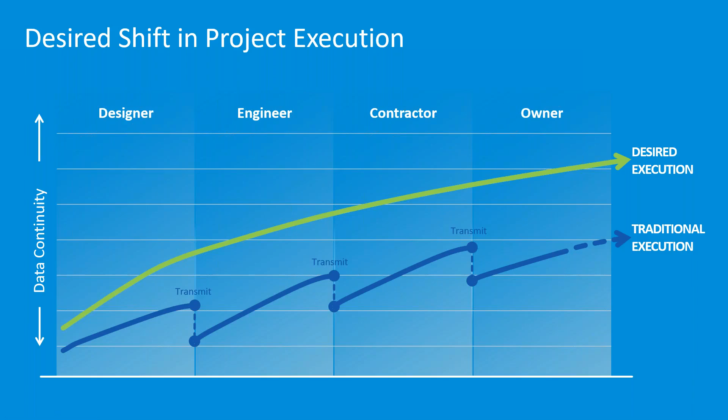That green line for us is really at the core. It means we've got a single source of truth, which is nothing more than a data management solution in the cloud. Our project data sits there.

And then depending on what discipline you're working for, we have some verticals on top of that. So essentially we're talking about a common data platform, which is BIM 360 Docs. Depending on the discipline—be that architect or structural engineer in the design phase, or in pre-construction—we want to understand whether what we're developing is indeed viable, from a clash detection point of view, from an aggregation point of view: is everything okay?

But then in the end we're really going to go to the construction side. We want to do health and safety inspections, progress tracking, etc. So all of this is the remit of BIM 360, and some tools that sit alongside that, such as the Assemble solution and PlanGrid. I'll touch upon those very briefly today.

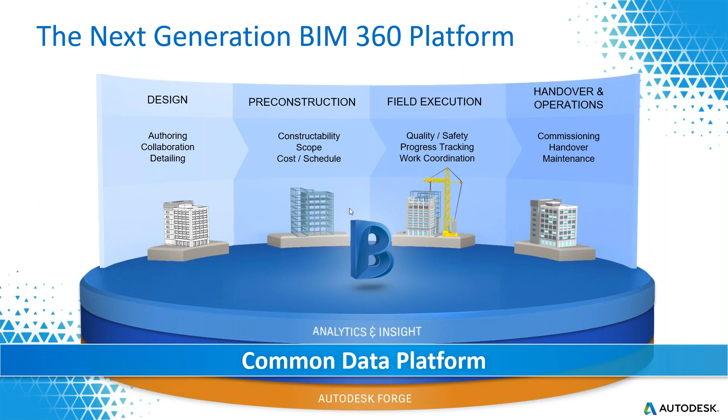Then in the end, as I mentioned, we're going to go to handover and operations, and this is really where we're going to be talking about digital twin. So before we can get to that—and we've done 3 webinars already on design—we need to bridge this gap, which we're going to be talking about in the next hour.

So from that phasing point of view, we've got design at the beginning, that's essentially BIM 360 Design. Then when it comes to constructability, clash detection, model coordination, that's BIM 360 Coordinate. I'm not going to touch upon this too much because that's going to be webinar number 5, where I'll be talking about coordination, and then BIM 360 Build.

So I'll touch upon BIM 360 Build today a little bit, but we're also going to revisit BIM 360 Docs in some of the aspects there. All right, so now that we've got this, let's actually dive into the solution.

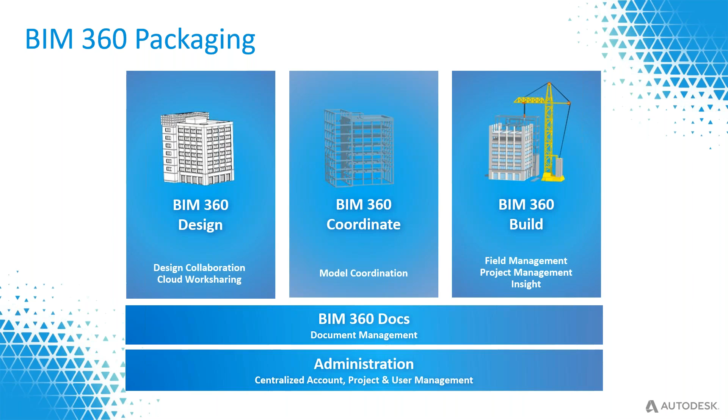I'm going to start with BIM 360 Docs. I've got a couple of things open here for today, but essentially this is what we're looking at, BIM 360 Docs. So essentially this is sort of Windows Explorer in the cloud on steroids, I would say. There's a lot more to it than just Windows Explorer. Yes, we can create folders, yes we can have security on it, but there's a lot more to it. It would take us too far to talk about everything.

The point I want to make here is that we're looking at a certain hub. This is the environment, in our case it's EMEA TS—Autodesk EMEA TS—this would be the company name that purchases the solution, for instance. And then we can have a multitude of projects underneath that. So we're looking at a very specific project, called BIM 360 FY21, but we could have multiple projects that we're working on.

So inside one of those projects we'll be looking at a setup of folders, right? So I can go in—this is highly customizable, we can set security on those folders. This can be done by user, by role of the user, or by company for which the users are working. So if I go in here, one of the most critical aspects of BIM 360 in general is the fact that we have this, what we call large model viewer.

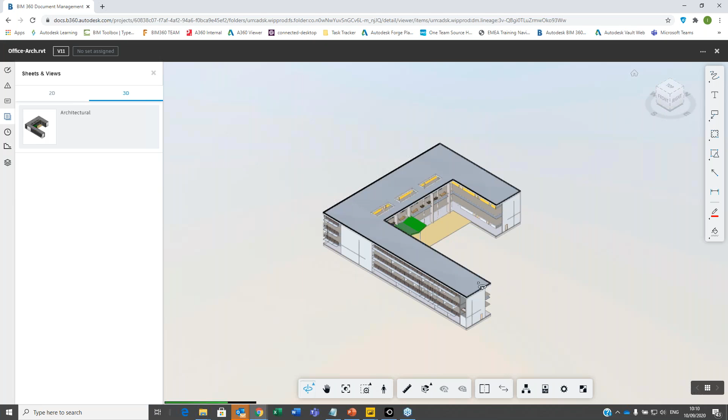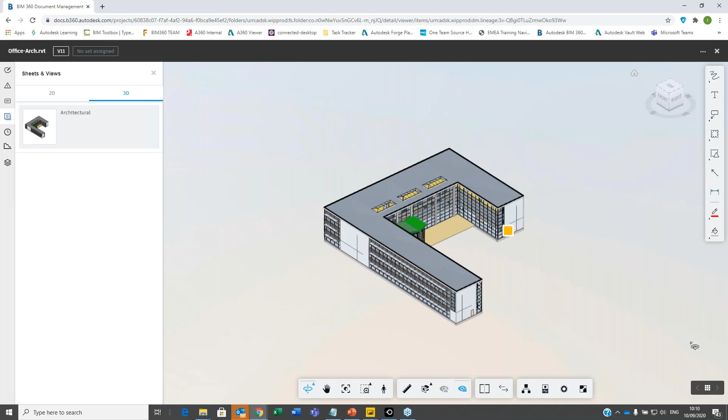So if I look at this file, for instance office architecture.rvt, if I click on it, it's actually going to allow me to visualize that file without the need for Revit. So this is a cloud-based viewer, and it allows us to view up to 60 different types of file format. This could be Revit, this could be AutoCAD, this could be IFC, SketchUp, Bentley MicroStation, SolidWorks, but also things such as Microsoft Word, Excel, PowerPoint, PDF, etc.

So loads of file formats are supported by this viewer. What does that mean? It essentially means I can start communicating with stakeholders within the AEC project, the building project, or the infrastructure project. Rather than having to flatten and dumb down everything to PDF and send it out by email, I can make sure they're part of BIM 360. Without the need for Revit or AutoCAD, they can actually view this file. And it's a lot more than just viewing.

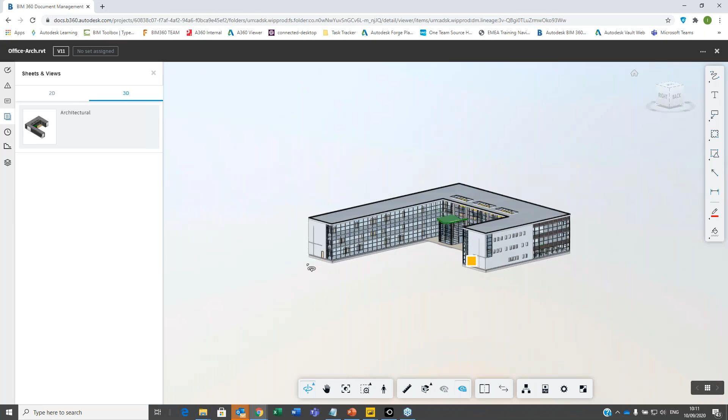So if I go in here, I can start measuring. Let's say I want to measure in meters, and I can say, right, I want to start measuring from this point to that point, for instance. Let's close this down for a second. If I'm mistaken here, I can just pull at that and adjust it.

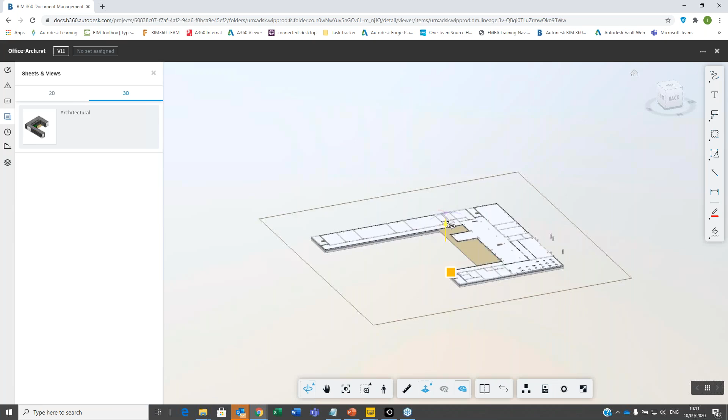Other aspects are that I can, for instance, start sectioning this model. So if I really want to understand what is happening inside of this building, I can do so. I can look into it. And since I'm looking at these different objects, I can also select them.

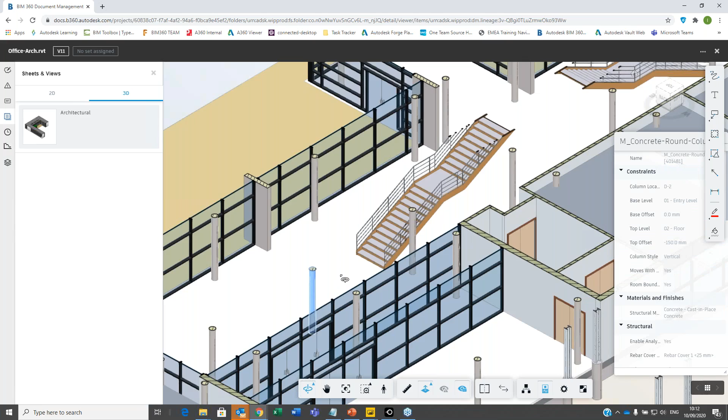Rather than just viewing these elements, I can really understand what the metadata is, and this is quite critical - it will come back later in the story. If I look at this column, it has all the metadata that comes from Revit, but it would also show metadata from AutoCAD, like the layer or block name, or the IFC characteristics if it were an IFC file. So what we're looking at here is some form of visualization of essentially a database, and that's going to be critical later because we can hook up all this information to other data sources. That's really where this aspect of digital twin comes in.

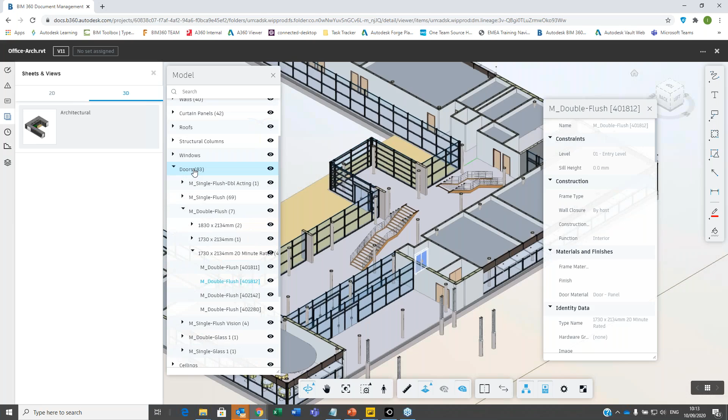Just to highlight a couple more things here - if I look at, say, this door, we get this information again. We also get the model browser, which depends on the file format, in this case a Revit file. So it's telling me this is a door, part of a list of doors. If I go in here, I can say show me all the doors - and I want to get rid of the sectioning. So we're getting a view of all the doors and where they're located.

If I want to understand the windows, I can do so as well. I can reactivate everything - as you can see, the interface is quite simple. So we can use this as a means of communication to just about anyone related to the project, and they'll get a clear understanding. This is like not flying blind anymore - it gives us a total understanding of this project, in this case, this one file. There are many more inside of this project, and we'll look later at how we can combine them into one bigger aggregated model.

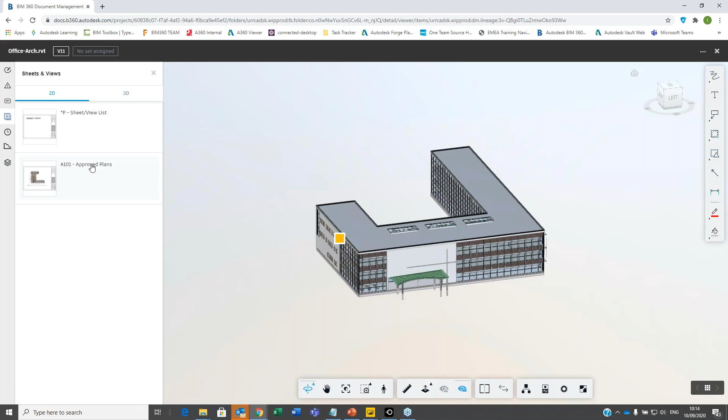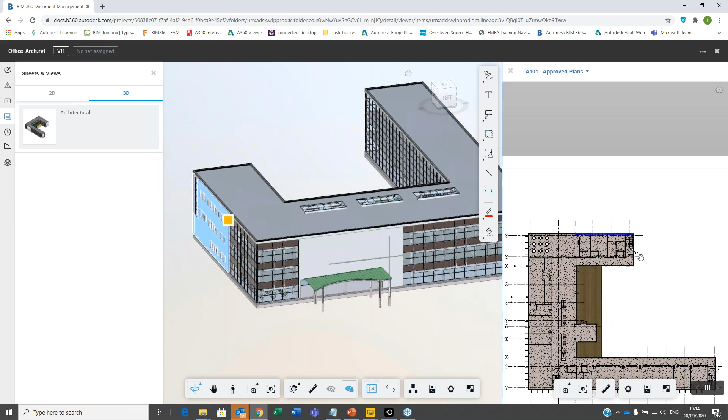The other thing is also that not just 3D, but we can also look at 2D. All of the information inside the Revit model as a 2D sheet is also there. So what I can do now is go in here and say I want a split view mode. If I look at, say, this wall, it's going to tell me where it's located in 2D as well, and vice versa. So if I select this door, it's actually going to show me this door.

I can zoom out and show all objects, so there's that one door that is also selected here. I can look at the properties here, no problem. So essentially, again, a single source of truth, not just at the project level or design level, but even at the object level.

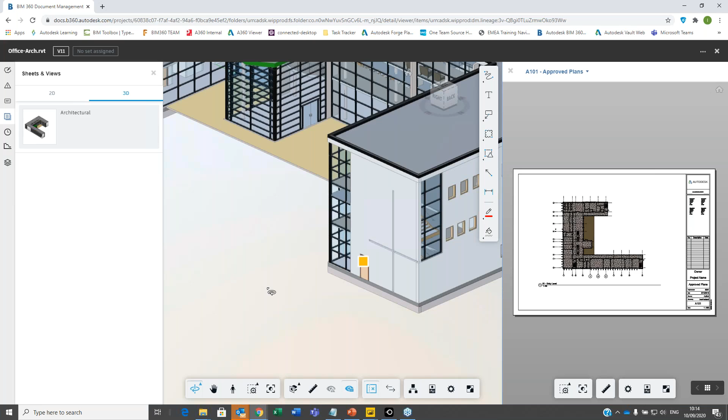All right, so I'm going to stop here with the large model viewer. As I mentioned, there's a lot more to it - we can manage issues, do markups, have RFIs, etc. Actually, you'll see an RFI here, which will come back later in the story. But let's come back and talk about some of the other aspects inside BIM 360. What you see here is a filter, which we call document management, but there are many filters here.

So we can actually look at cost, for instance. We can look at how people are going to collaborate from a design point of view. That's really the remit of BIM 360 Design.

Here's my model coordination that I'll talk about in two weeks' time. We've got a couple of things such as checklists, health and safety inspections that sit under field management. We can do submittals, we can do RFIs - that's the remit of project management here. Again, too much to mention today.

What I want to show you is one last thing, which is this asset module that we've created some time ago. Essentially this allows us to manage not just view on a sub-component or sub-file level, but really manage those elements inside of BIM 360.

So for instance, if I go in here and say duct fittings, maybe standard, I can click on this rectangular duct. What you'll see is I get a listing of specifically those rectangular ducts, showing the status: installed, specified, etc.

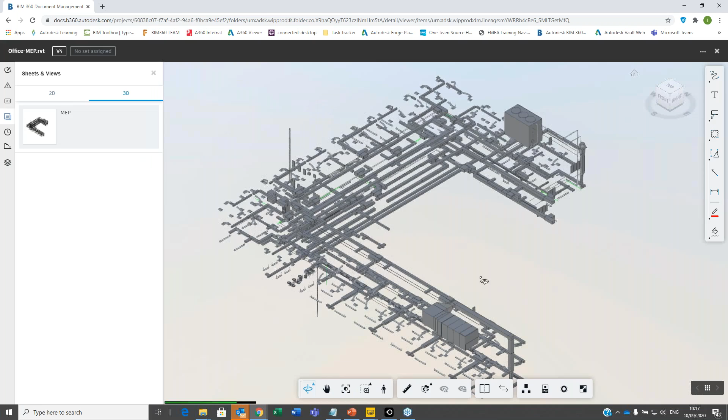This is clearly an MEP story, so let's go back to document management. I'm going into my design here again, into my MEP this time. So we're going to be looking at a different design of the project - this is all of my systems inside of one file.

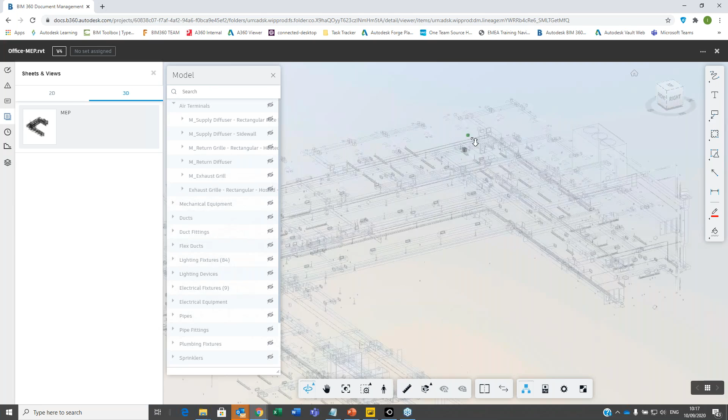You'll notice it says air terminals, mechanical equipment, lighting, pipes, etc. - it's got all the disciplines inside. So what I can do now is go in here and say, okay, I want to look at this one and see this rectangular duct cross. So that's where this guy is sitting.

If I look at this and go into the properties again, you'll see it says rectangular duct cross, etc. And interestingly, it also tells me data - this is the BIM 360 asset link. So I can go back and forth. I can click on this one and it will actually open BIM 360 Assets. It will jump through that whole list and open that very specific item again with the very same Revit ID. Okay, so that's what we can do here.

As I mentioned, the whole thing around this asset module is that it's connected to the design. There are a couple of ways of exporting that information as a list inside of BIM 360. But the main thing is we can specify the status of this thing, create issues and checklists, and put attachments on there. So if we have, say, a technical specification for this specific asset - and remember, this asset can come from maybe even an IFC file or a Revit file - we have this information here and can attach all of that rich data.

So it's not just for a web interface that we have. Let me just quickly get my iPad up here. Okay, so let's go into my viewer here and switch on my screen mirroring. There we go - so I'm looking at BIM 360 Docs, the app on my iPad, right?

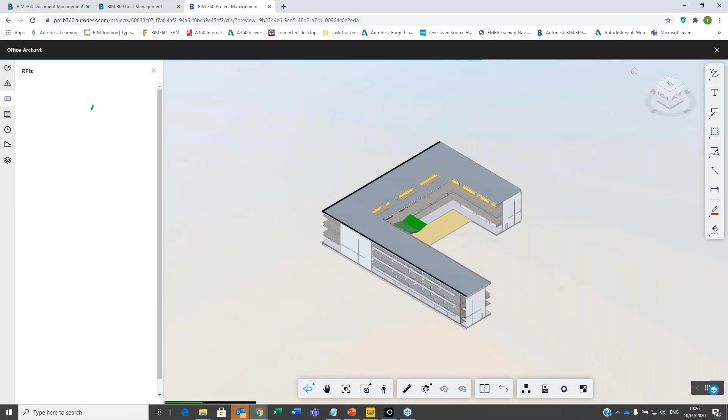So an RFI, potentially, if the workflow went through and the manager said, yep, this is indeed a problem and it's going to cost money, we can actually hook up the two of them. If I go in here, it brings me to my RFI module in project management, and it tells me the status. There's actually a document attached to it - remember this Office-Arch.rvt file. So we can create those RFIs on a mobile device, have them reviewed by the manager. This is a problem, we're making it into a cost element and we analyze the cost. That's really the concept of enriching the data as we go along.

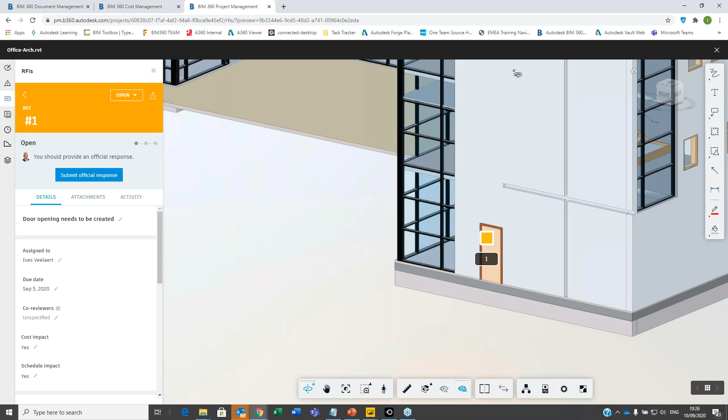This is effectively that one RFI we looked at in the past. It's still open, but as a manager, I could say, right, I want to move this forward. So I can submit an official response. Right, so that's my cost module, and there are many more. The most important thing is all of them are connected to that very same rich information, and we're just building on top of that through submittals, transmittals, checklists, on-site work, etc. This gives us a total picture of our AEC project, our building project.

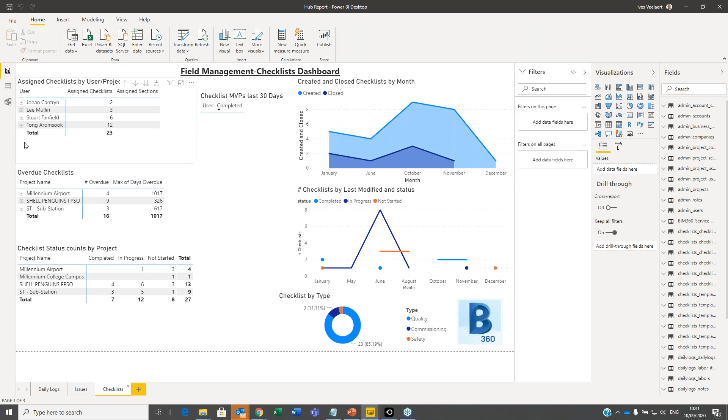So with those checklists and everything, that is the very same view. Again, I can publish, get the URL and bring it back into BIM 360 docs, which you see here. This one. So to make sure that all of this data is up to date and now we fully understand - we're getting into the understanding of the building as it's going to perform as we're building it. This is already, to me, part of the digital twin analysis, if you will.

All right, so with that, let's quickly move forward. We've got all of this design information. It's moving through the timeline of the project and it's getting to the construction side. We've shown a couple of things with mobile devices, etc. So let's say we're now ready to take the next step up, which is connected to other data sources and move towards that concept of a digital twin.

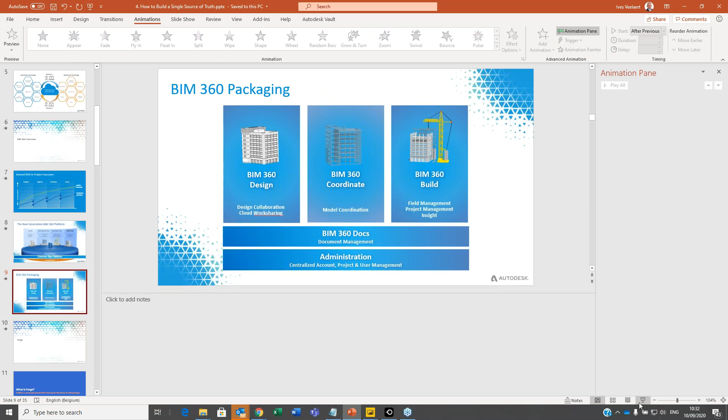So let me just go back to my PowerPoint here for a second, and I'm going to move very swiftly into the Forge story. We're going to use the API to connect to just about any database that is out there and that we need - maybe because there's other information in there, maybe that's an ordering system and we need to understand how this is coming through into our models. So essentially we're going to be using Forge for that.

And Forge is the API of BIM 360, which essentially means that anything you do inside of BIM 360, you can automate it. It's a bit like the API for AutoCAD or for Revit. Anything that you think of that you want to do with Revit in an automated way, for instance, generate sheets automatically - I'll get to that in a second because that's quite important also from a Forge point of view - we can do that with Forge on BIM 360.

So all of the stuff that we do inside of BIM 360, we can get to it through the Web Services API, and that's really what Forge is all about. It's a set of building blocks which can be brought together to do some really intelligent stuff, and I'll show you some examples of what we can do with it. Essentially it's like building a spaceship within Lego - it's exactly the same thing. We have these building components and we can do some intelligent stuff to, in our case, a building or an infrastructure project or whatever.

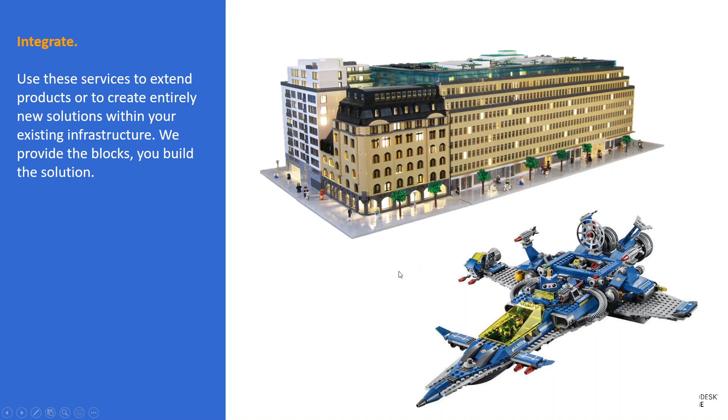Okay, so without spending too much time on the actual coding behind - obviously we're not going to do coding here - just a couple of concepts. Forge isn't one API, it's multiple APIs, and you see some of them at the bottom here. We've got the derivative service, which essentially allows us to view files in the viewer. We've got access control, the OAuth service, which allows us to log into the system.

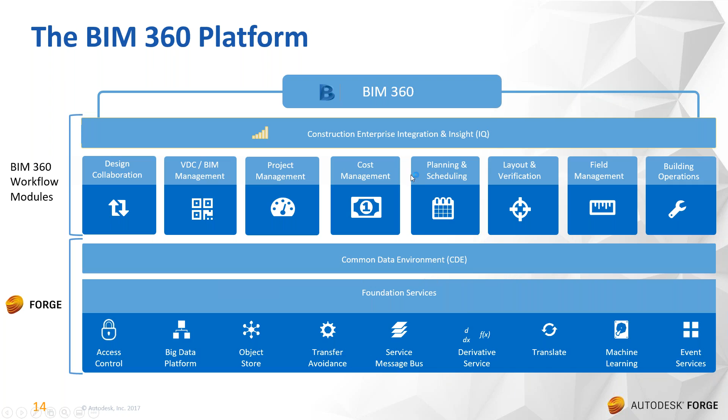So there's loads and loads of services that we can use within our project. And then at the top, we've got some very specific ones for design, collaboration, project management, etc. - these are the BIM 360 workflow modules. And we'd like to think that the number one user of Forge is Autodesk itself, because indeed all of these modules have been built on that very same API.

Right, so moving towards digital twin - how are we going to use Forge? There's actually two things that we can use it for.

There's a lot more, but what we see people use it for is insights, understanding the data, and automation. So I'm just going to go through some of the examples here.

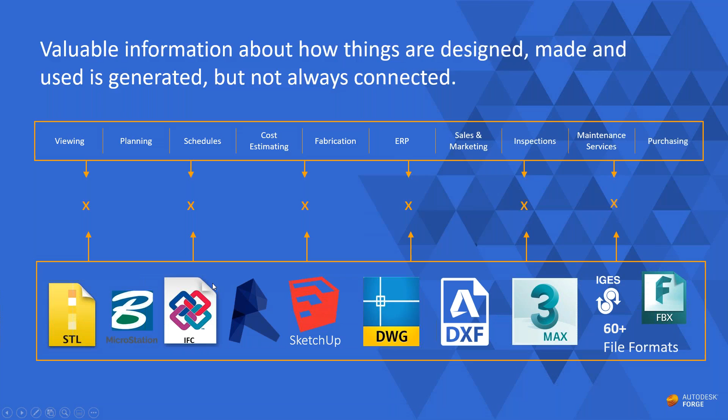Essentially, Forge is the connection to anything that sits within the company. You have a planning tool, schedules outside of BIM 360, an ERP system. On the other hand, you have all this rich information inside the design files. Forge can make the connection between those files and, for instance, an ERP system. So really Forge is there to connect all of these different company systems together, if you will.

From a developer point of view, if some of you are interested in actually developing yourselves, I'll get to that in a second. But essentially, take any web developer who's graduated recently, they'll know about all this stuff. We're not doing any rocket science here. This is all based on standard web technologies - JavaScript, HTML, CSS, React, etc. If you were to talk about this to a web developer, he'll go, 'Yep, that's exactly what I use on a day-to-day basis.'

All right, so insights. I'm just going to give you a couple of pointers here of what people are doing. So this is JE Dunn in the States, I think it is. Essentially, what they wanted to do was bridge the gap with the architect, for instance. So if you're on a construction site, this is a construction company, right?

Let's say there's a delivery that's not going to happen, like the windows are delayed by 2 weeks or whatever, and you need to come up with alternatives. First you have to run this through engineering and maybe the architect, or both, to see whether that's going to still stand if we're going to do a design change so late. Those people will not be happy because this is months after the original design has been approved, right?

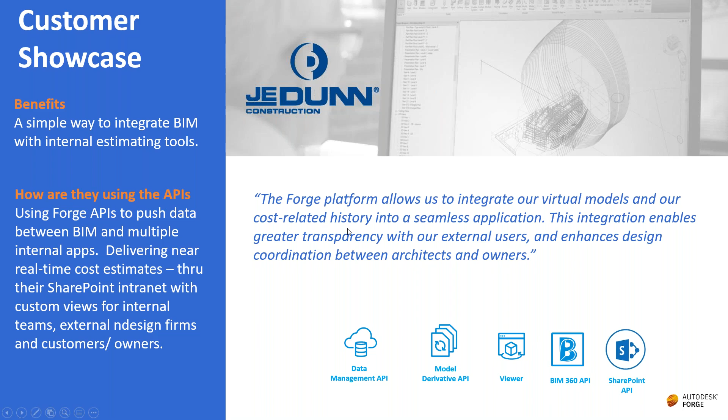And so this is really what JE Dunn came up with. They wanted to do a what-if scenario. Essentially, they've got the design and they're going to go, right, what if we do double glazing and replace it with triple glazing? What if the wood is going to be replaced by aluminum windows, etc.? But obviously not just for windows, for just about anything. So they're using that viewer and hooking it up to their cost system, and they're just doing what-if analysis. This is then being reviewed, and in the end you get alternatives that are really ready to replace if and when it is needed.

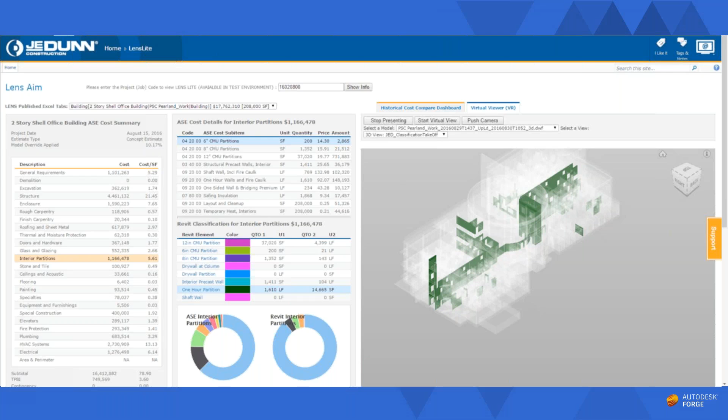So another aspect, as I mentioned, the different services - you can also catalog them by what they're doing, what aspect they're being used in. I mentioned insights, so obviously the data management API and model derivative, which generates the viewable and the viewer itself. Now there's this second aspect called automation. There are two aspects here that are really critical, which is webhooks and design automation.

Webhooks essentially means that we're going to listen to a folder, or that the API is going to listen to a folder or folders. And if something is happening in the folder, it's going to activate code. That code could mean activate design automation. So what is design automation? Design automation is essentially, in a nutshell, Revit in the cloud, Inventor in the cloud, AutoCAD in the cloud, and 3D Studio Max in the cloud. So that means we can send a routine to Revit in the cloud and say, do something with it.

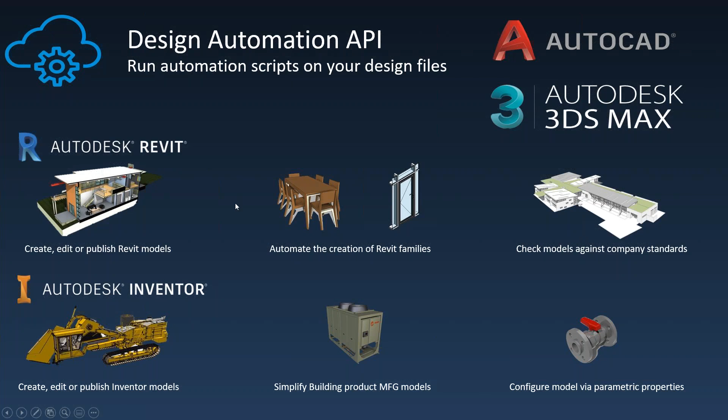Imagine I was to have a Revit file that gets into BIM 360 in a specific folder with just a model, just one basic 3D view with everything inside, no sheets, no 2D views, nothing. Well, there will be 2D views for the design itself, but not really any specified sheets. So what we can do is use webhooks to understand, oh, there's a new version here. That new version kicks in and opens Revit in the cloud, and according to a set of rules, generates the sheets automatically. And that's going to be my new version in BIM 360 docs.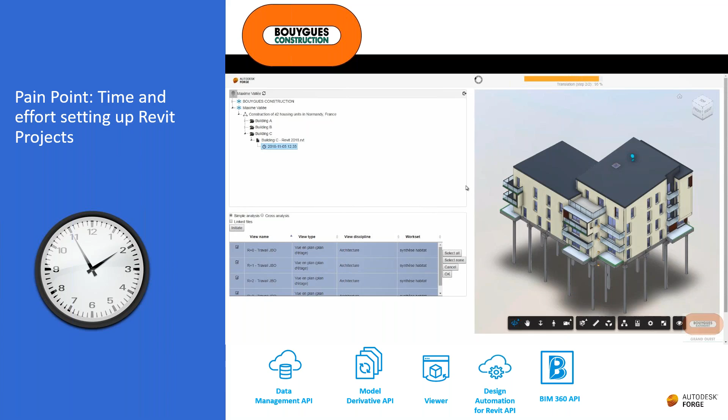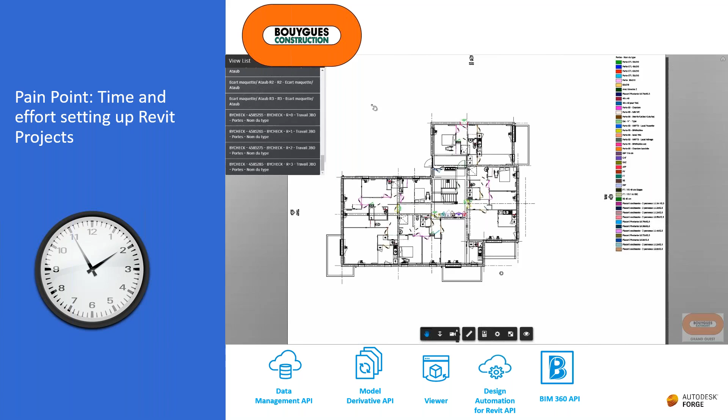So this is now pushing this information into Revit in the cloud, into BIM 360 design, into the design automation. And what we're going to get back is a new version of the file with all of the views inside. So all of these views, you can actually activate them and look at that. So that wasn't in the original file. This has been generated automatically. So that's one aspect of design automation.

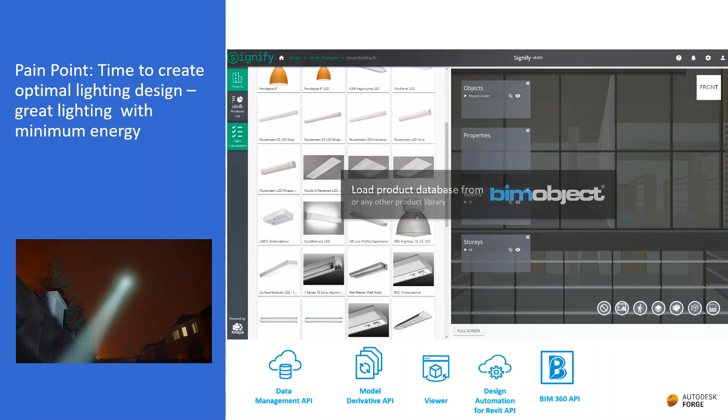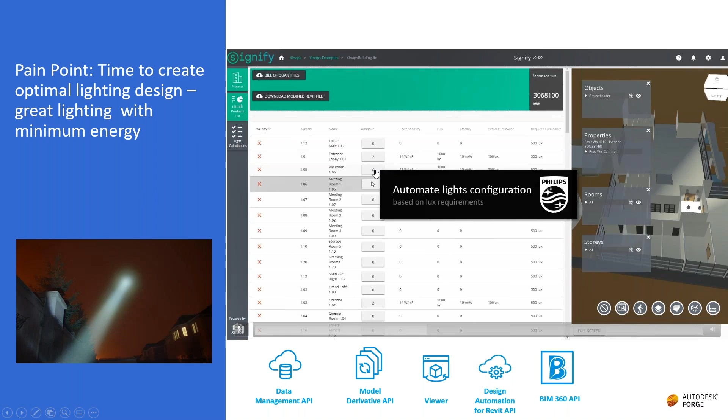Let's move forward. Signify, just very briefly, this is where you can have a conversation with like a sales guy from a reseller of, in this case, Philips, for instance. And we've got this whole library of lighting fixtures. Just through the viewer, we can drag and drop these lighting fixtures in as one aspect, or we could look at a room schedule and say, right, this specific room needs 2 light fixtures or 6 fixtures or whatever. And it's just gonna build that automatically. And in the end, again, we can generate that new Revit file, open it up, etc.

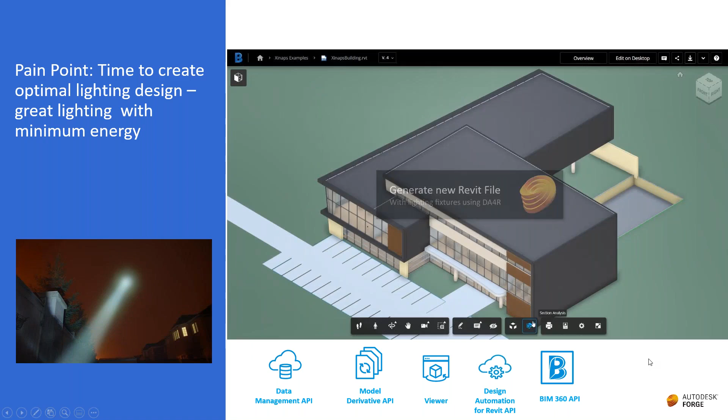So moving forward, last aspect here of Forge is that design automation. And this is really interesting because what you'll see is that we've got this one version of a Revit file with a table inside and a specific seating, right? This is a very specific Revit family. Now, this family comes from an Inventor part, so it's actually an export from Inventor as a chair. So what you'll see here is that if I look at this chair, that's exactly the same one. So we've just basically exported this from Inventor into an RFA or Revit family, imported it into the Revit project, and that's where we are right now.

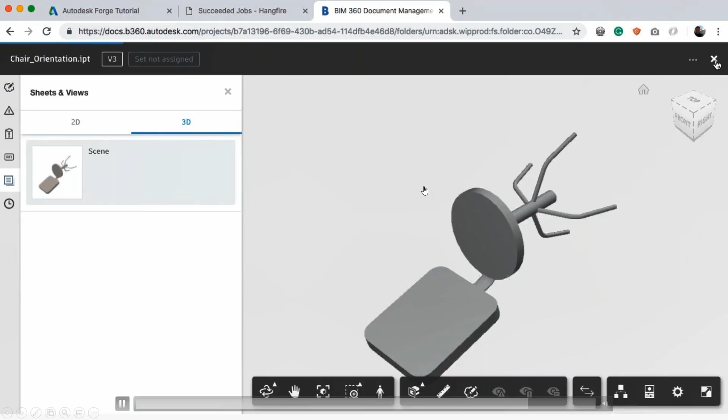So what we're gonna do is, again, through webhooks, we're gonna upload a file, and then through webhooks, we're gonna activate some code. So we've just uploaded a new Inventor file, an Inventor part. Automatically through the webhooks, it's gonna say, aha, there's something happening here, so I'm gonna start Inventor. I'm gonna open up that IPT part, and I'm gonna use that new part to make a second step, which is the export to Revit. And then in the end, I'm gonna open up Revit. That's my third step. And I'm gonna load my newly generated RFA into version 2 of my Revit project. So you'll see that automatically that seating has been replaced. So what we've done here is from Inventor, automatically we've got a new design and the Revit files get updated automatically. Right, so again, as I mentioned, those are the services.

So I'm just gonna stop it there for a second. And let's look at some more examples. So let's start with some basic stuff here. Let's go in and say, okay, so these are all kind of examples. So let's go in and use the model loader here.

So again, we're going to be looking at the large model viewer here. And what we're going to do, people tend to ask me, can you aggregate multiple models? Is that possible? Well, BIM 360 Docs as such will manage those different files. And indeed, BIM 360 Design, as we've seen in previous webinars, can aggregate multiple designs so that you understand what you need to accept and what you need to send back. And then there's obviously BIM 360 Coordinate, who can also aggregate models, and we'll talk about that in 2 weeks' time. But essentially, the possibilities are there.

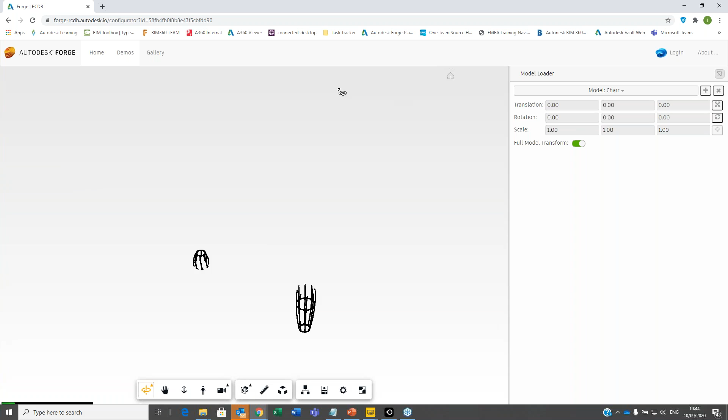And so therefore, because Forge is the API which sits underneath, I can actually say, right, I want to load something. Let's say that I want to load a chair. So it's now basically loading that chair. As I said, this is a proof of concept, so it's just basically showing a couple of fixed elements in the library. Again, the whole viewer is there. I can measure, I can look at the hierarchy, etc. But what I can do now is say, okay, I want to have a second one, which is going to be, let's see, maybe a table assembly.

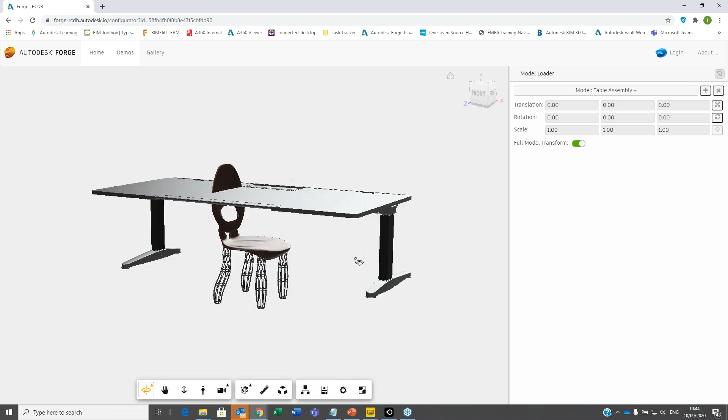There we go. And as you can see, well, that's not really nice. So we could actually go in here and say model chair, and use this to move my chair, maybe rotate it.

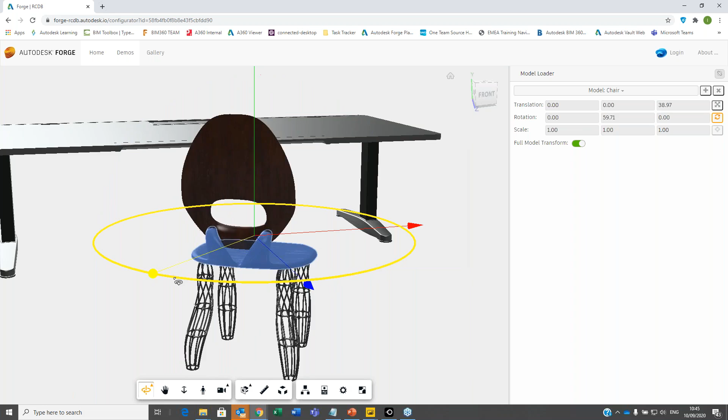There we go, and so again, this is quite possible, as you can see. Let's just move this away. So we can indeed, through code, assemble and aggregate multiple elements together, because we've got the code, we're using it in BIM 360 coordinate, we're using it in BIM 360 design.

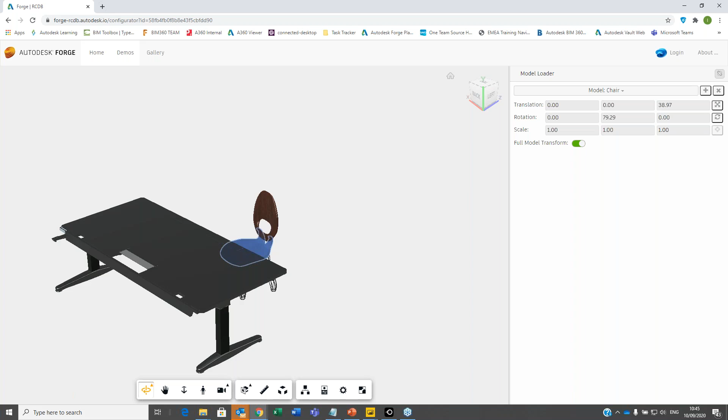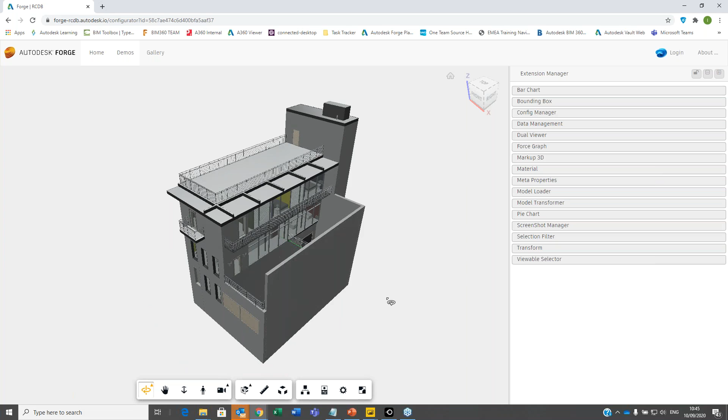All right, so next aspect maybe, let's go back here, is the extension manager. So let's say that we have a very complex problem, and yes, BIM 360 is very capable of doing markups and issues and RFIs and what have you, but maybe this is such a complex project that I really need to explain what is happening here. So it requires some sort of video, if you will.

So what I'll do is I'm just going to activate some of the subcode here. I'm going to activate transform, and you'll see there's a button here, I'm going to activate markup 3D. And indeed, I'm going to go into this config manager.

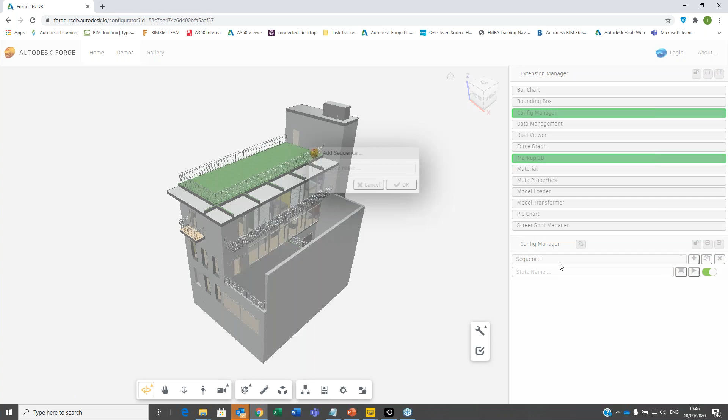And the config manager here, it's going to save a sequence of states, if you will. So I'm going to go in here and say, okay, I want to have a new sequence. And I'm going to call this digital twin overview. Digital twin overview, there we go.

And actually, this is my first state, so I'm going to save this first state, right? The second state I want to save is actually when I open this wall, and that's going to be my second state. And if I run this now, so there's this play button, it's going to move from state 1 to state 2 to state 1 to state 2, etc., etc.

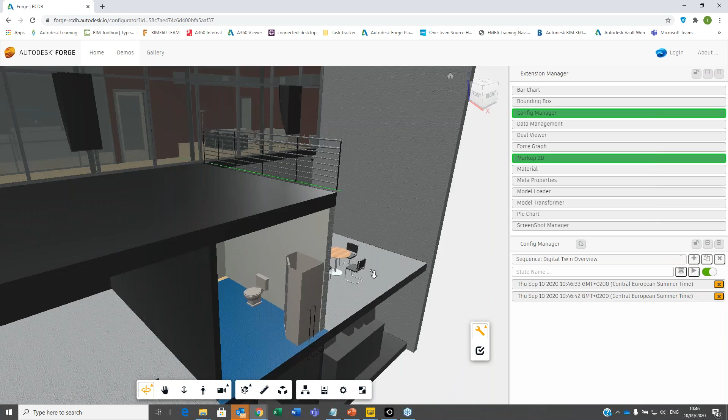So let's just keep it like that. So I can now go, right, I want to do something more here. This is going to be my third state. And actually, I want to get some information on this element here. There we go, and so that's going to be the next one.

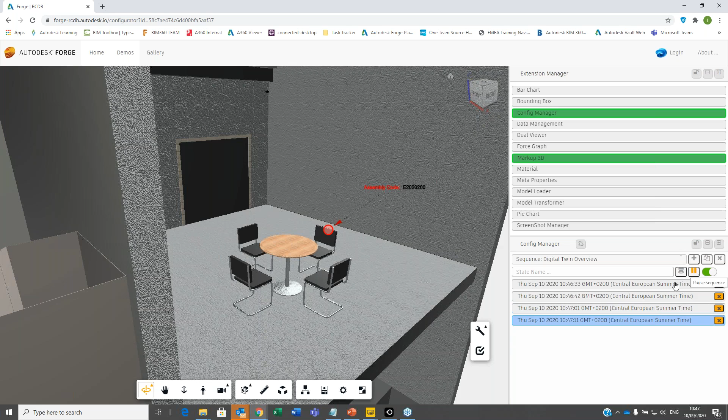So I can go back to my first state, and it's going to close everything up. So if I now run this, it's going to say, right, open up the wall, zoom in at the markup, etc., etc. So this is just another example of what we can do with this information. So again, not necessarily the concept of digital twin itself, but it will allow us to enrich our information and make sure that in the end we have an as-built project that we can indeed use for the concept of digital twin.

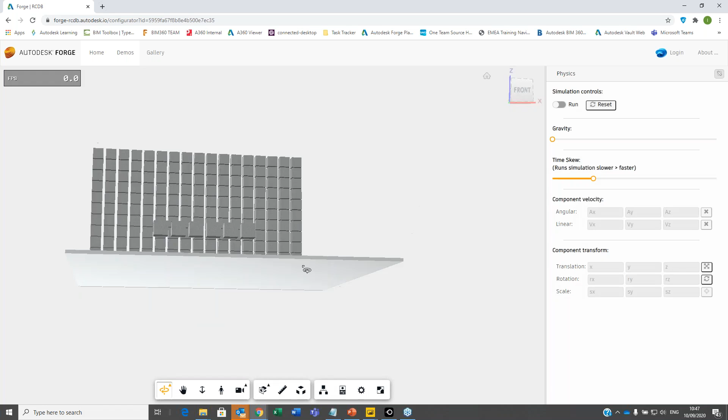So another one, it's got nothing to do with construction actually, but I like it, so it's quite cool actually. So I will show it, which is we've hooked up our large model viewer with a gravity engine. So if we're going to be looking at this essentially, still the viewer, right? And what you'll notice is these blocks, they're not sticking to one another. So if I just zoom in, you'll see there's a bit of a gap there.

Okay, so the proof of concept we've done here is, you know, just run it, boom. So you'll notice that if I do a reset, those blocks fall on top of each other, and then the rest of the animation continues, right? This isn't really an animation, this is really calculated. So we've got a couple of parameters here.

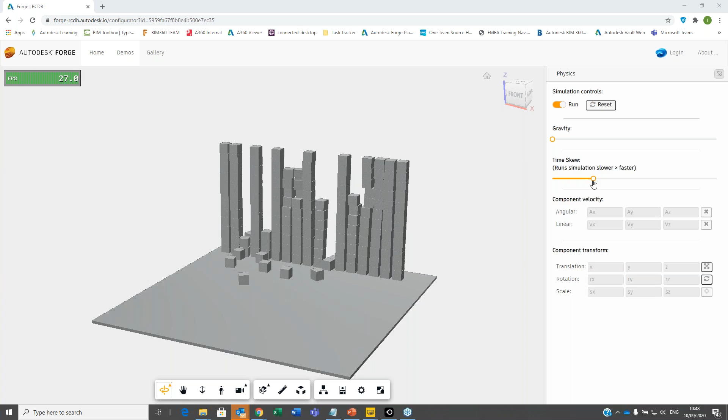So first step is that I can slow down time dramatically. So let's just do this in slow motion. There we go. And the second aspect is I can actually go from minus 9.8 gravity pointing down, to 0. So now we're in mid-space, right? So if I hit run, well, it's still gonna move forward, but there's like no gravity anymore, no more parabolic fall to those elements.

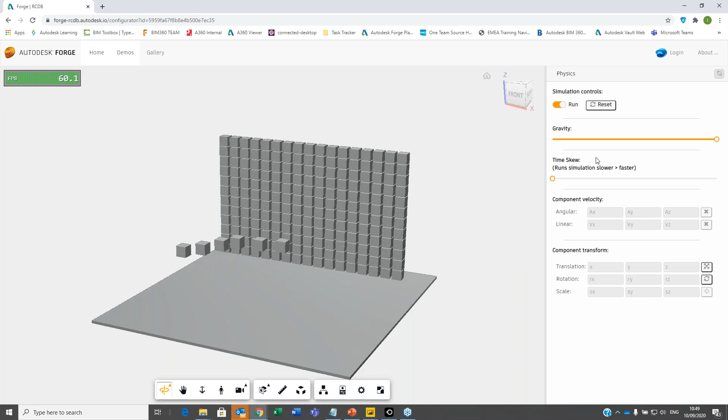But the cool thing is that, let's just do a reset here. All of this is still dynamic. So what I can do is if I hit gravity again, then they will start falling, see? So again, nothing to do with construction, but it is quite useful if we're looking at, for instance, applying this in a building and making sure that if we drop furniture inside of the building, it will actually stick to the floor, for instance. So that could be an example of it.

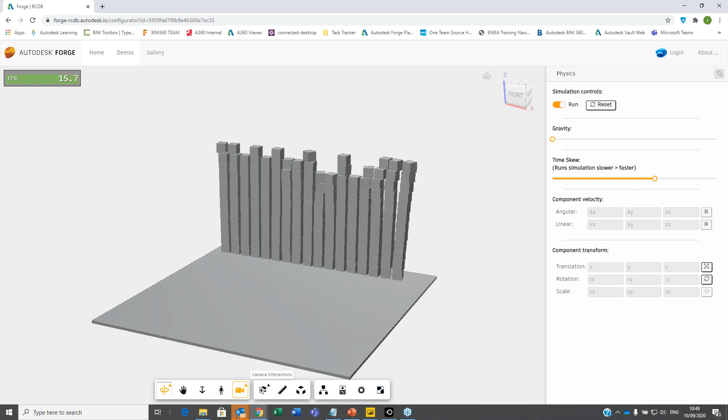Right, next piece is, as I mentioned, still Forge. All kinds of developers have been developing stuff on the App Store. So just Google BIM 360 App Store, you'll get to this one, you select BIM 360 here, and you'll see some of these elements, some of these tools categorized by discipline. So what I can do here is I can go in and say, right, this is actually a tool that we've developed as Autodesk.

You might have seen it's free. It connects into any BIM 360 environment, and it allows us to do some quite intelligent stuff here with the design files. So if I open this link, first thing you'll notice is that it's going to hook up to all of my BIM 360 environments. I have a couple of them here, but this is the one we're looking at: EMEA Technical Sales, BIM 360 FY21, project files, architectural. This one has 11 versions, which corresponds to what's inside of BIM 360, of course. It is a single source of truth. So that's what we're getting here.

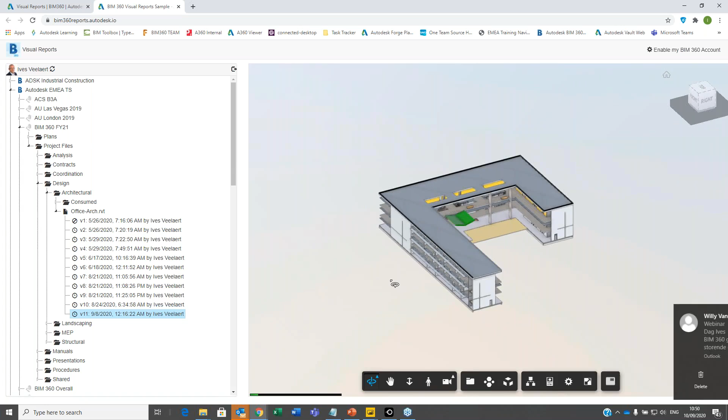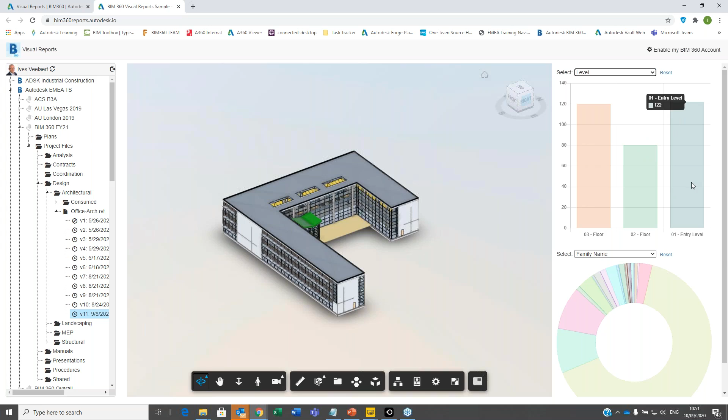The thing it does is it starts analyzing the metadata inside of my file. So on version 11, I can actually look at, for instance, get me all the elements according to level. So I've got 120 on the third floor, 80 on the second floor, and entry level 122. If I want to see them, all I have to do is select them. What you'll see here is that we can have a different visualization through a pie chart.

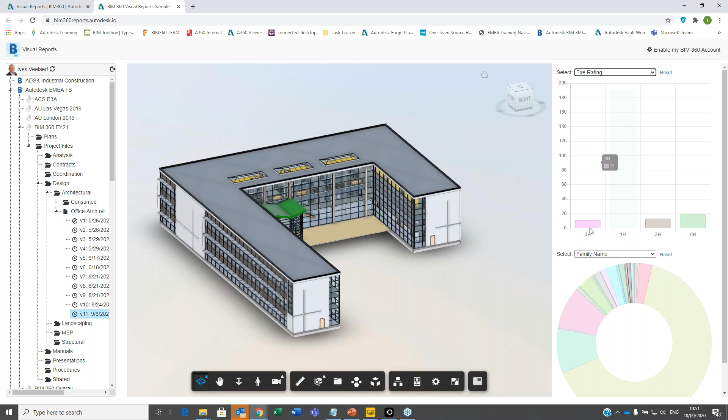So if I want to understand where all the curtain walls are, I can do so as well. Very easy to understand what is happening. This is something that I used with customers where they say, well, we receive elements from the architect, and we really want to understand if he filled in the fire rating, for instance. So I can actually go in and understand what the fire rating is on all of those different components. And if there are blanks, then I can find them and eventually send the file back.

And remember, design automation, webhooks. So I could actually use this code to say, for the architect, the file gets sent into BIM 360, a specific folder where we have webhooks. This code in the background kicks in, analyzes the file and says, oh, there's blank fire rating, and it automatically sends the file back to the architect. That's also a possibility.

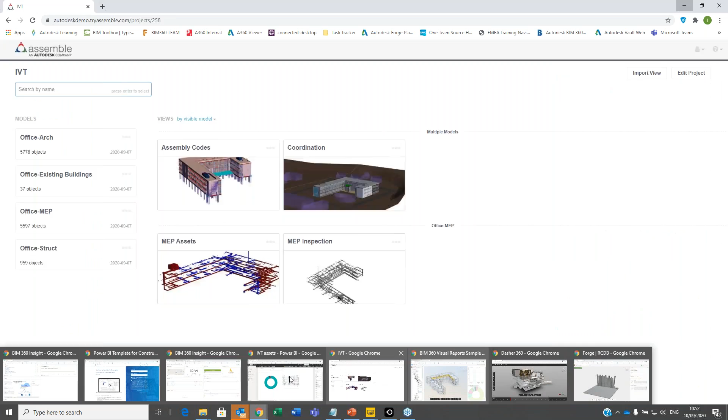Okay, so we're almost there when it comes to digital twins. So let's go into where are we. As I mentioned, we can also do database linking. So let's see where it is. I think I moved across it. Data management, no, not that one. Just bear with me for a second. This one, and then I think it's this one. So, Office.

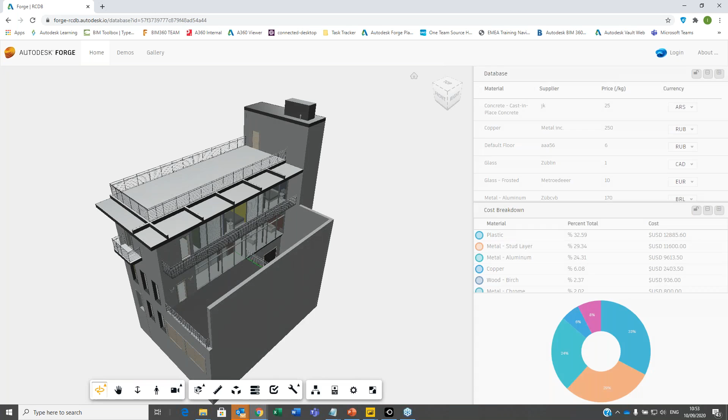As I mentioned, we're almost there when it comes to digital twin. So what you'll see here is that we've got an external database, and so we can have all of that cost listed on my different elements, for instance. So what you'll see is that it says here, structural concrete cast in place, with a certain cost. That's going to give us the cost of these elements. So if I was to change this in the database, you'll see that when it comes to the concrete, it's at 0.11%. So if I change this price in the database to 2,500, then you'll see that the concrete cast in place now is 10% of the whole thing. So that's how we can leverage the information inside of the model, hook it up to an external database, and do some analysis with it.

All right, so let's move on to the final examples then. As you've seen, we've got this whole model now. We've made sure that it is an as-built project. We've got all the tools that we need with the transmittals, submittals, checklists, etc. We get to a model that is fit for use now.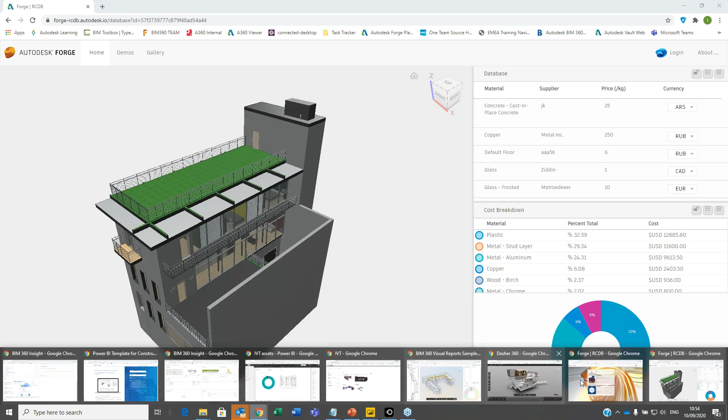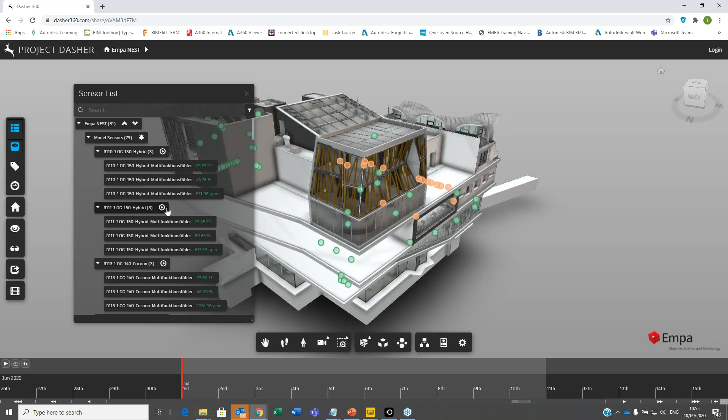So one of the things that we've been playing around with is something that's called Dasher 360. What you see here is, again, that very same viewer. And what we have is now a list of sensors, for instance, and I can actually visualize those sensors. If I want to go in here, I can then say, show me one of those sensors. Let's take that one, and it's going to zoom in and tell me, well, here is my specific sensor that I can zoom into. And I've got all the information that comes from the environment there.

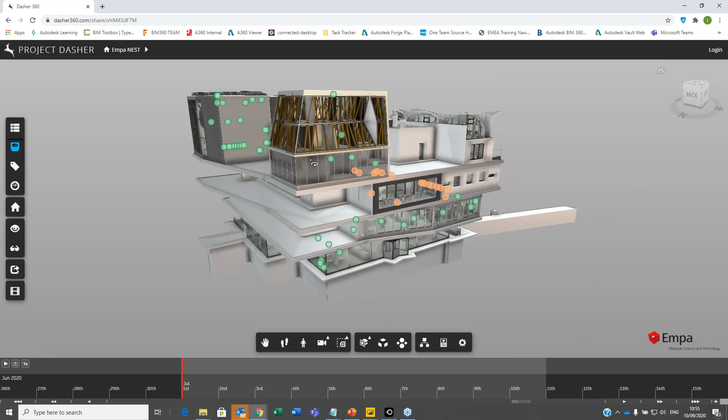If I go back to my top folder, I can actually say, right, these sensors, that's all of them. So I want to have sensor occlusion, so show me just the ones that I can actually see that aren't hidden behind walls. You'll see that at the top here, I've got a couple of sensors.

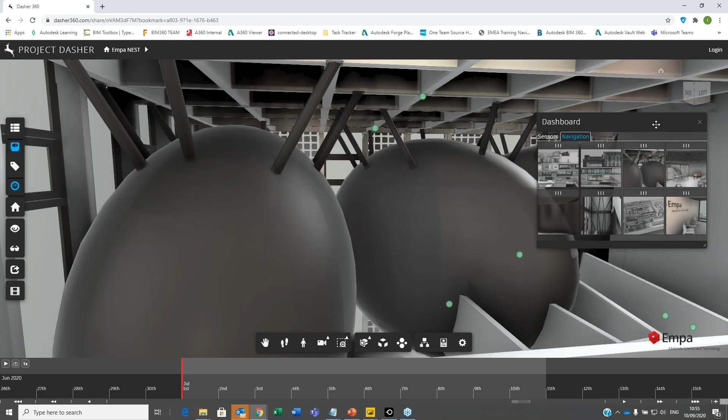I also have my dashboard, which will give me the most critical sensors that I need to look into, or maybe I just want a specific view that I can have a look at and specify and look at the sensor information there.

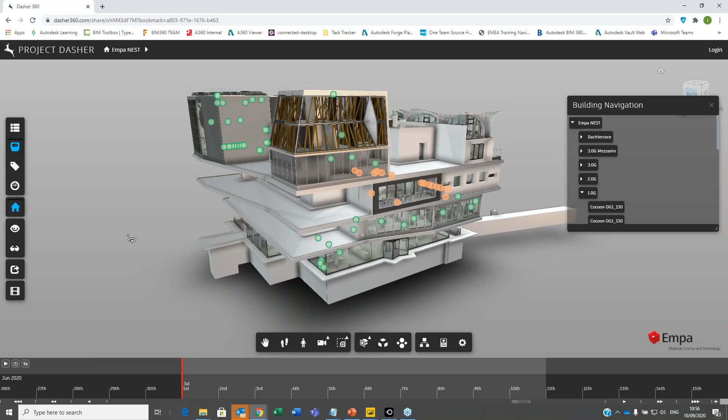Last aspect, let's go back into my building here, top level. Maybe I want to understand how this is moving across time. A digital twin is about getting that information, understanding it, optimizing our building, but also understanding how our building operates. So with those sensors, the actual visualization isn't of too much importance. What I want is, for instance, this one level, first floor, to look into all of the sensors that are there.

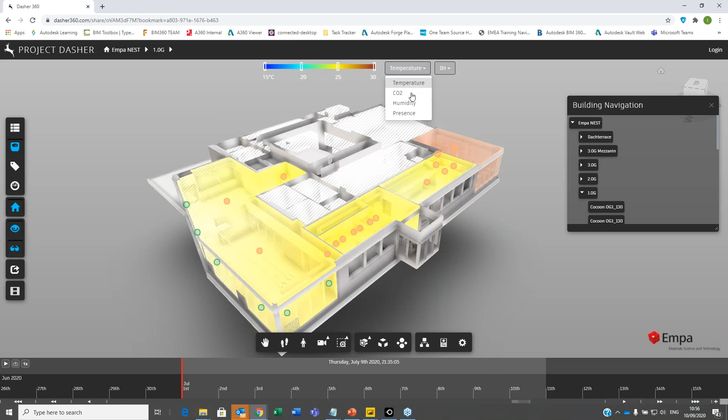And I'm looking at temperature on a one hour time base, so I can run this and understand what is happening in those different locations, because that information is now hooked up. As you've seen, we can hook up databases to rooms, we have the sensor information, so we can do that here. Maybe I want to understand CO2, quite important these days, so let's have an understanding of CO2 inside of those different rooms.

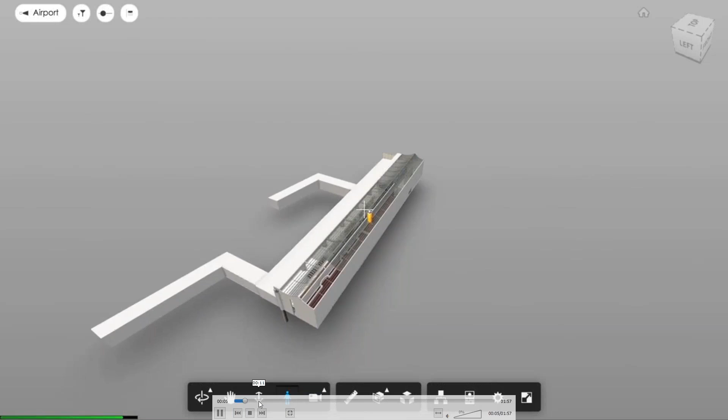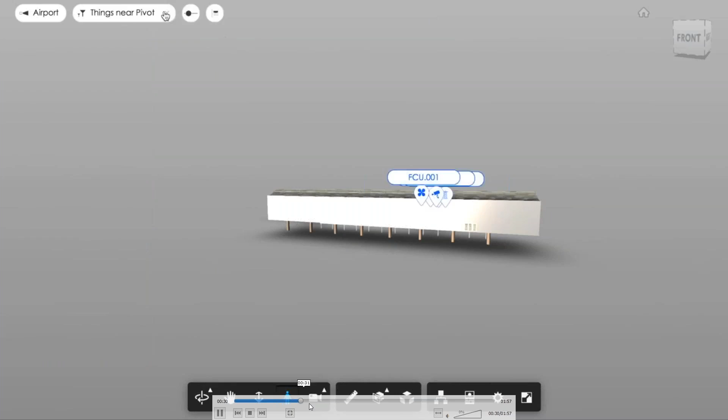And then a last thing I want to show, the last example, is one of our partners who have developed this digital twin tool. This company is called Iviva, and they're leveraging the information inside of the BIM model. I'm going to quickly step through here, and you'll see that all of the sensor information is now tied up into a nice interface, and we can control those sensors, or control those interfaces, from one central location.

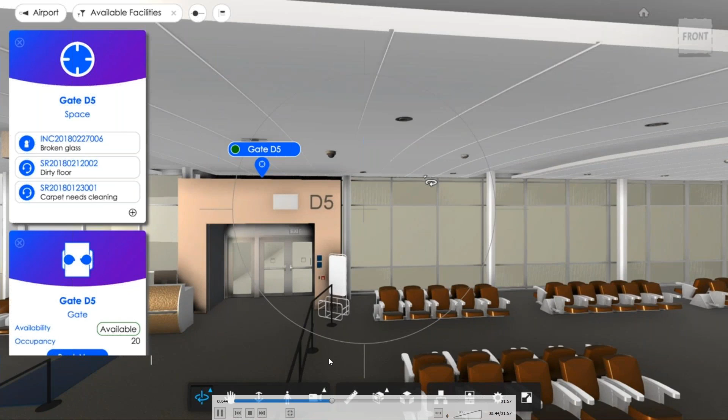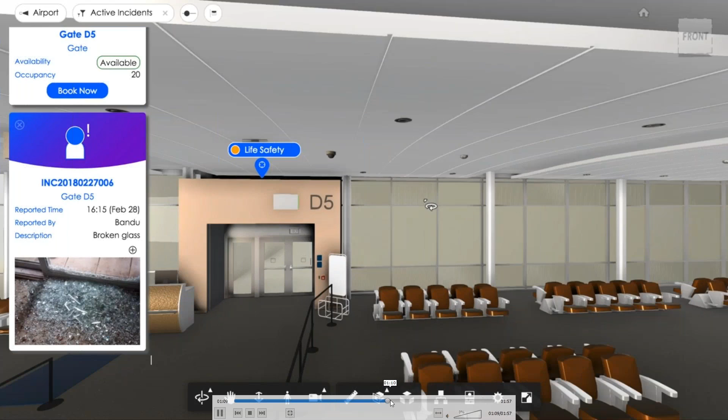So we can look at incidents here. If there's an issue at a certain gate in an airport, let's move forward. We can look at those different incidents and understand what is happening at that gate. Maybe there's a fire happening, so we can start switching off the fan, putting on the lights, etc. Again, this is the next step. It's not just understanding the data anymore, it's optimizing the data, but also controlling the information through the digital twin, in this case through a dashboard, and making sure we control the actual analog building that sits somewhere on the globe.

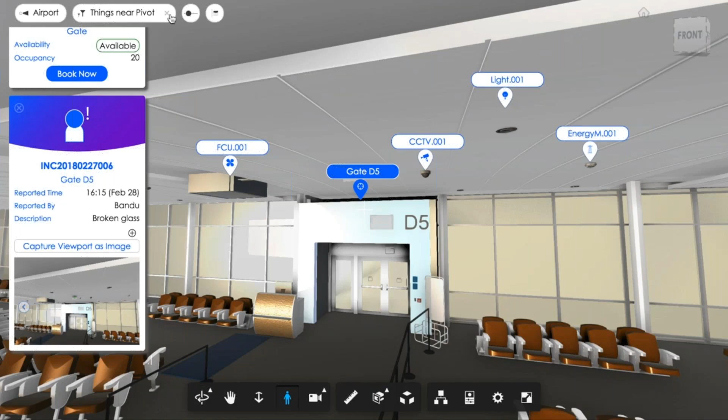Does cost management have possibilities to connect to ERP? Well, actually yes, because as I mentioned, we can get through the Forge API, so we can hook it up to just about anything.

The system is not going to tell you that an AutoCAD block is a door unless you've called that block a door. So what it will do is show you the block information and the name, but the intelligence of what the system shows depends entirely on what you receive. A PDF is going to show nothing. A DWG file is going to show layers, blocks, and types like polylines and circles. Revit files will show you the Revit families, the levels, etc. So depending on the file format, you'll get different results, but you will get all of that information inside of the viewer. Feel free to have a go at it and see what comes up.